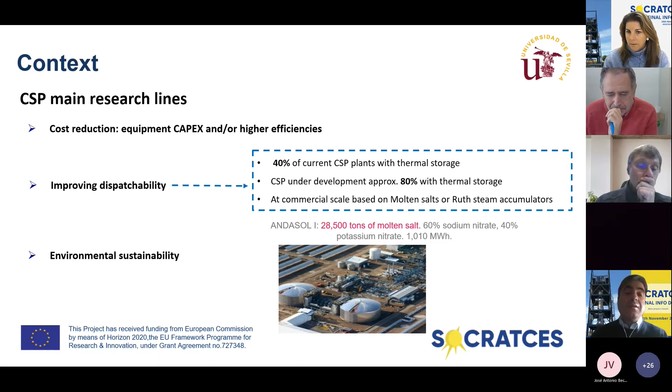Our project, SOCRATCES, is aimed at the part of dispatchability, providing a large energy storage capacity based on a non-toxic, abundant material. We base our concept on the calcium carbonate decomposition into calcium oxide and carbon dioxide.

Energy is stored by breaking the chemical bonds, and when heat is required, we mix again these products to produce calcium carbonate.

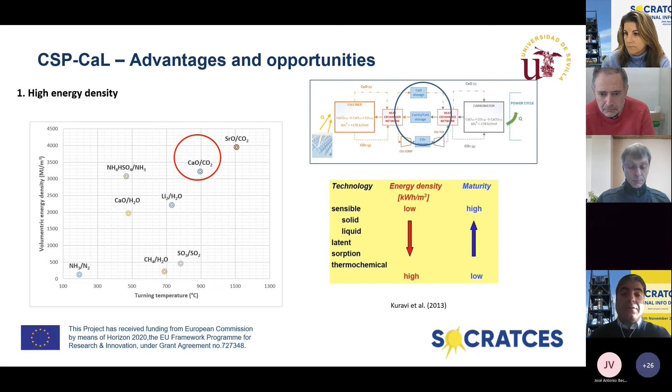It also has the advantage that the storage can be done under different strategies. It can be done at ambient temperature for seasonal storage, minimizing thermal losses and parasitic consumption of auxiliaries, or with a different strategy developed for daily operation. This can be done under different criteria and configurations, obtaining different global efficiencies with different technological approaches.

One of the most important characteristics of this concept is that it is based on abundant and stable materials. Limestone and dolomite have low price, are abundant and widely available, and are non-hazardous nor highly contaminant. These are characteristics for the large-scale deployment of energy storage systems.

On the side of the discharge, we have heat release. Depending on the pressure in the carbonator, we can have delivery temperature very high, which allows the integration of advanced power systems like supercritical carbon dioxide cycles, but also, at even higher temperatures, gas turbines.

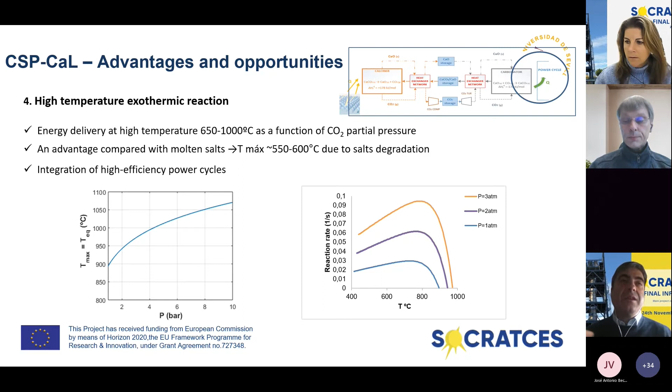The behavior of the carbonation will depend on the temperature in the reactor. Here you see the reaction rate depending on the pressure and how it changes clearly depending on the carbonator temperature. This is an important issue that affects the design, and it will be highlighted later in this webinar.

Also considering direct and indirect integration, we can use this excess CO2 in the carbonator directly as a heat transfer fluid, evolving through the turbine in a direct integration, avoiding the use of additional heat exchangers for the power cycle, but with challenges regarding the integration and dealing with granular media separation.

This is a direct integration, but it also allows the indirect integration, in which heat exchangers are provided between the heat release in the carbonator and the power block. It allows the integration of well-established technologies such as Rankine cycles, externally fired gas turbines, or, for instance, the supercritical CO2 cycle still under development.

Regarding the advantages and opportunities, materials and equipment are used at an industrial scale in many of the required parts of the system. Many of the equipment is already used in the cement industry. The type of reactors, entrained flow reactors, have been proved at industrial scale in other applications. So an important part of the equipment to be used at industrial scale is already available, or at least the knowledge for the development.

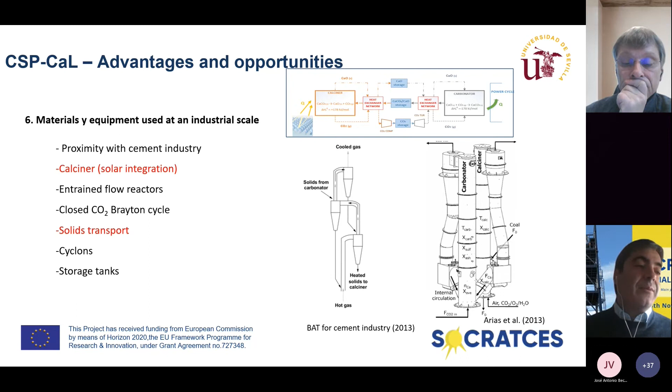The challenges: we have a high temperature receiver, and if we are operating at ambient pressure, we will need over 900 Celsius degrees. But also you can consider that it's a closed loop. Different pressures can be used, so I will show later on other opportunities for working at more reduced temperatures, or in other combinations to reduce these high temperature requirements.

If we go to these high temperature requirements, the size of the solar power plant will be conditioned, and probably we will need smaller power plants, not thinking 100 megawatts, but smaller in order to reduce the optical losses, increasing the optical efficiency. Besides, we have to consider particles residence times, thermal gradients control, and how would be the continuous operation.

Regarding the alternative for reducing the calcination temperature, we have tested within this project the effect of steam calcination. Today we will have a presentation related to the relevant effect and how it reduces drastically the temperature in very affordable conditions. How also helium calcination is a very promising or interesting option, and also how vacuum calcination affects things. All is related to the CO2 partial pressure.

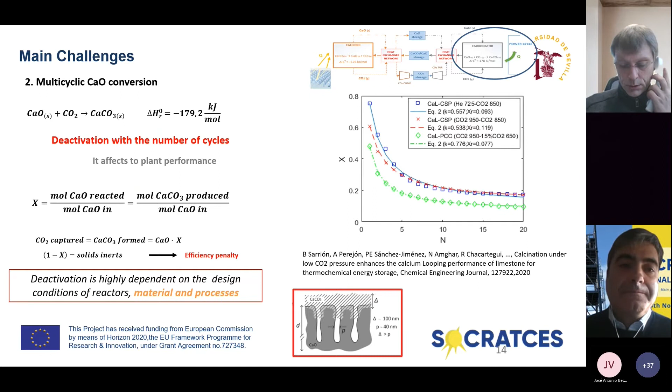Summarizing, we have calcium oxide precursors with low price, wide availability, and harmlessness. Carbonation for power generation or for generating heat in industrial processes can be obtained at high temperature, allowing high efficient generation of electricity or high efficient industrial processes. Reactants and products can be stored at ambient temperature, depending on the strategy. If we want seasonal energy storage or daily energy storage, different storing temperatures will allow different cycle integration.

We have a high energy density there to maximize storage capacity, and materials and process equipment, most of them are well known in large industries like the cement industry.

Regarding our SOCRATCES operation conditions, we are going to a technology readiness level 5. What we are trying to demonstrate is how, at these non-laboratory conditions, under a higher scale of flows and masses, the behavior of the material is, how the reactions are, and how the control and designs affect the different processes.

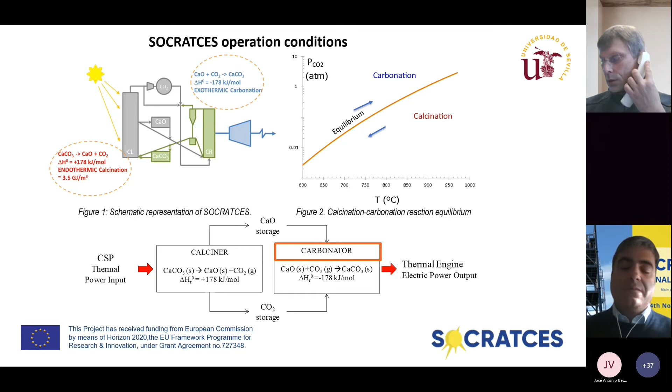So, for instance, we have studied how the partial pressure of CO2 affects the carbonation, or how this partial pressure of CO2 affects the calcination, regarding the level and degree of development of the different reactions and processes.

What we identify is that operating at high concentration of CO2, not necessarily pure CO2 but high concentration, the level of deactivation of the material is clearly different from the one obtained when we have atmospheres mostly with air.

We have that this difference in behavior allows us to deal with a more reduced amount of materials, easing the design, reducing the requirements for replacement, and showing high competitiveness because of the reduced cost and feasibility of the technology compared to potential designs based on CO2 capture conditions. This is an important result related to this project.

The objective of our project, we will show the level of accomplishment we have had in the following presentations. The SOCRATCES global objective is to advance the knowledge of calcium looping for thermochemical energy storage. We have developed prototypes of different components, studied their integration and performance. All the experiments and activities we have done are oriented to generate new knowledge about the whole calcium looping process, equipment, materials, reactions, transport, and so on, in order to identify and solve the challenges for the development of larger scale equipment to advance to the commercial situation.

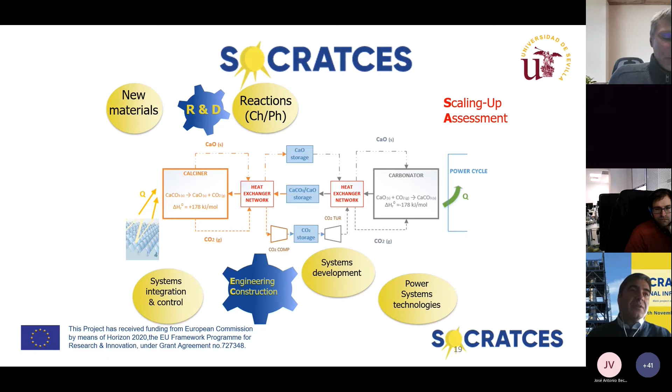Along these 4 years, we have developed new concepts regarding solar cyclone calciner, downer gravity closed loop calciner or downer, closed loop carbonator. We have spent around 2 years developing models, analyzing different designs, and within the constraints that we had.

We finally went to specific designs for a prototype conceived to get the maximum information about reactions, processes, and equipment. This design, or these designs, is not a beta version of a scale-up system, but is specifically conceived to get the maximum information regarding these parameters, reactions, processes, control, design, to take it into account for a potential scaling up if it happens.

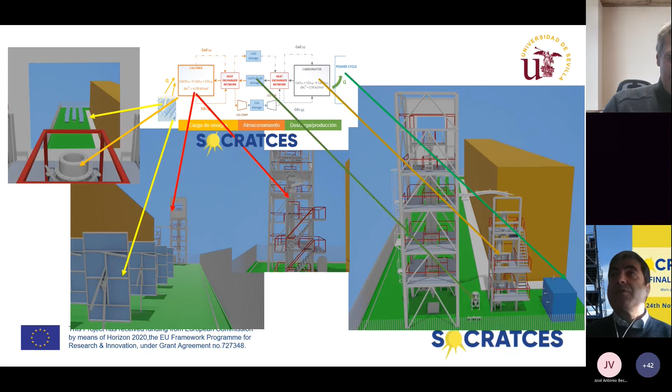So it's not a beta version of a power plant, of a real energy storage system, but in a smaller size - no. All the systems have been conceived to get the maximum information for a potential scaling up and to resolve potential issues, potential problems, or challenges.

Here you have how it looks, our prototype, how the different parts are related. Here you have the calciner, cyclone calciner, the vertical calciner. Here you have the carbonator, downer carbonator. Here the power block, the integration between them.

After many challenges, many of them shared with many other colleagues, the pandemic and the problems for constructing and erecting the pilot plant - but not only that, also to understand how everything works, to understand how to solve issues that we have learned.

And the plant provides results - not immediately. We have many issues, as you can understand, being first of its kind, the most important components. So until we understood completely the processes, the operation, and so on.

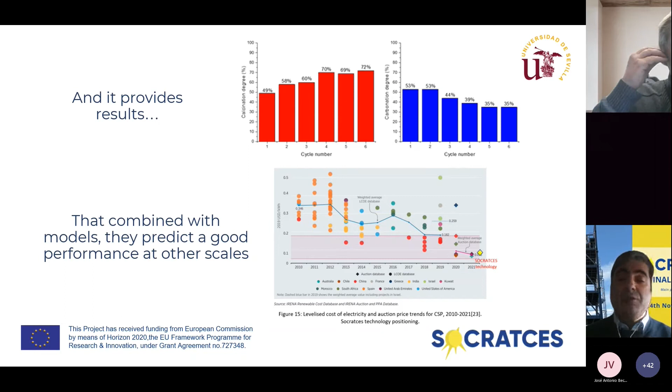Well, it has been a 4-year journey. We have had many stages, from the concept, advancing on the concept, the design parts, then the components construction, then erecting the pilot plant, then operating the plant, and now with this info day.

Until the end of December, we still will follow with the project and we will think of future steps together. All the information, you have it in our website, also on LinkedIn.

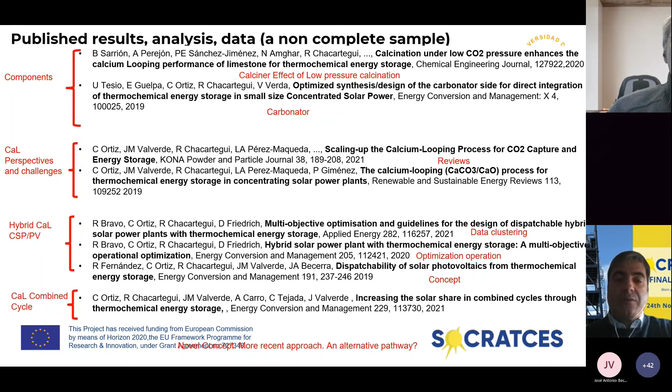Well, with this, I present this introduction about the technology, and I would like to share with you now.

I would like to share with you a video about the construction. I think it will give you an idea of what we have done.

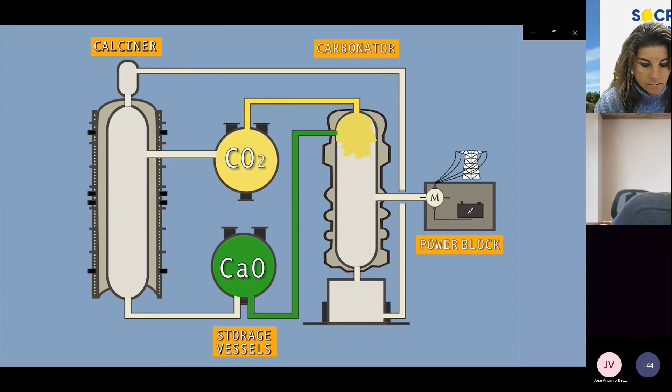Solar power is concentrated in the receiver to provide heat for the decomposition of calcium carbonate. The products of the reaction are stored at ambient temperature for hours, days, or even months. When energy is demanded, the calcium oxide and CO2 streams react to obtain again calcium carbonate, releasing the stored energy in the reaction. SOCRATCES is an integral and multidisciplinary approach where different knowledge areas are involved.

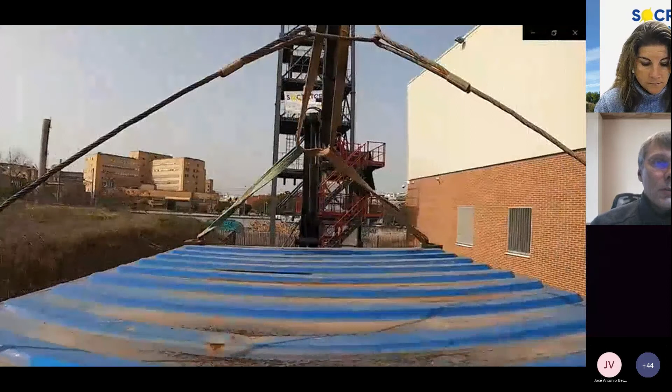SOCRATCES aims to demonstrate a novel concept of thermochemical energy storage. It uses one of the most abundant materials on Earth. It is based on the reversible reaction of decomposition of calcium carbonate into calcium oxide and carbon dioxide. Heat is provided by the sun. High temperature heat is recovered when the products join. This heat can be used in high-efficiency power cycles or in industrial processes.

In SOCRATCES, we are constructing a prototype, the first of its kind, in which we try to demonstrate, identify issues and solutions of the technology and the concept for evolving towards the commercial level.

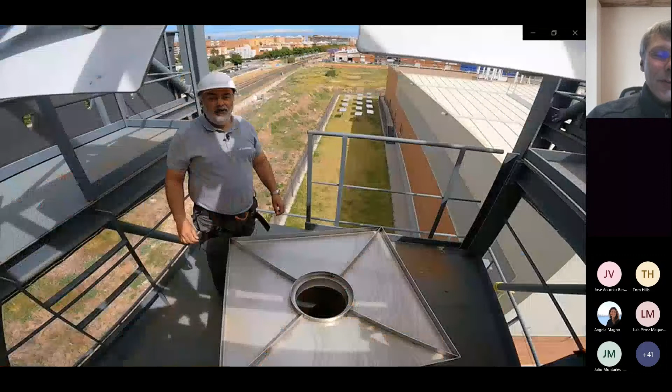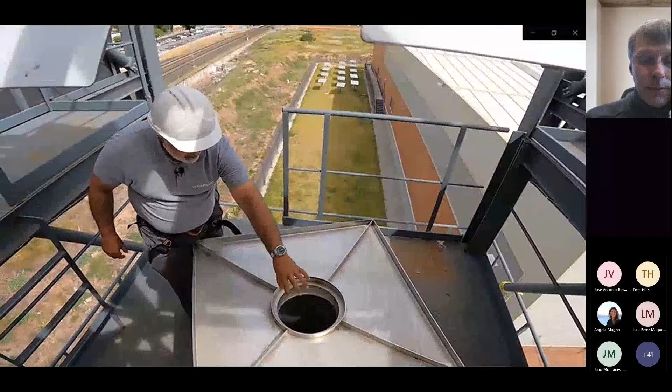We are on top of the calciner right now. Down there is the heliostat field, which reflects the solar power into this secondary concentrator, composed of 4 parabolic mirrors, which have the focal point inside the aperture cavity of the solar receiver. Here, an annular chamber receives the calcium carbonate along with a CO2 stream, forming a swirl which homogenizes the temperature, and the calcination reaction takes place.

This is the carbonator. Here we have the vessel in which we collected the calcium oxide before in the calciner, and put on top of a screw feeder which will dose the proper amount of calcium oxide to the reactor.

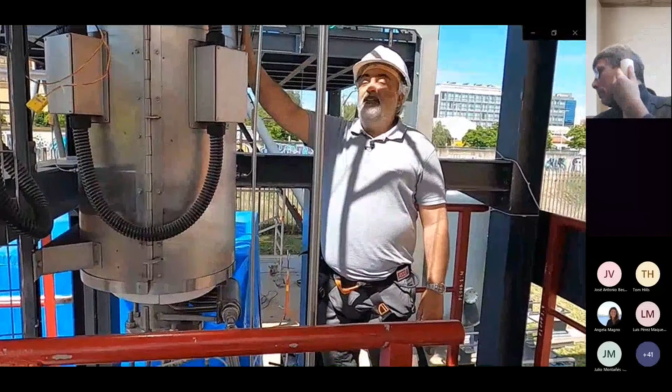This is the Carbonator reactor. Here the calcium oxide, previously supplied by the screw feeder, is mixed along with the CO2 stream in a reaction that releases energy. This thermal energy is collected by a bundle of tubes, which conveys to the stream of compressed air, heating the air and delivering the thermal energy to the Stirling engine in the power block.

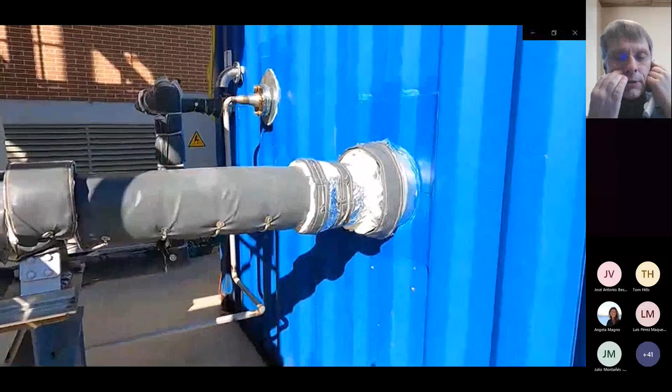The result of the reaction, which is again calcium carbonate, is collected in this lower vessel, which later will be moved to the screw feeder for the calciner tower, closing the cycle.

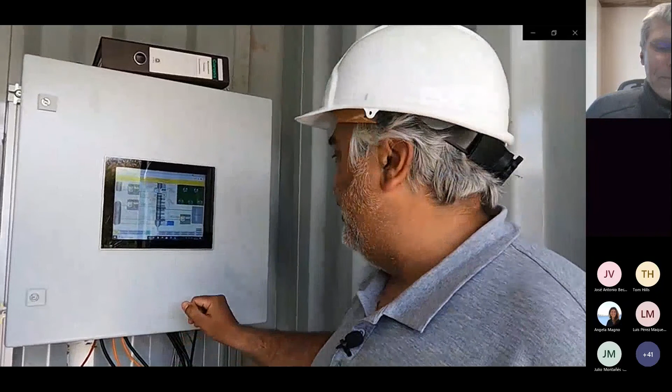This is the power block. Here we have two main systems, the Stirling engine and the main control for the SOCRATCES project. Here we have a local display, which we call HMI, Human Machine Interface. Everything can be controlled from this local display.

Okay, this is a video in which we try to show how our global prototype is, and to show at least a small part of how we work, how we have been working these months. So now to follow...

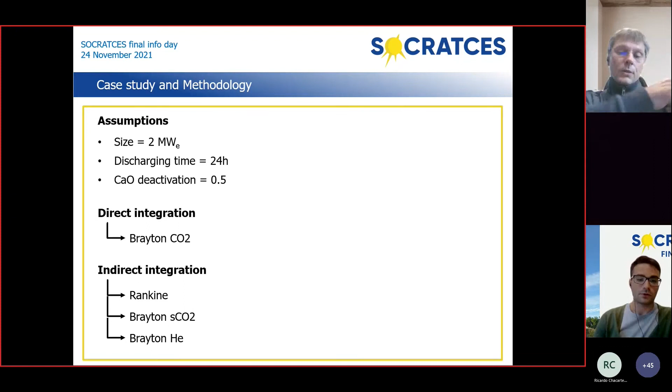The characteristics that we wanted to obtain from the optimization process are different. First, we want to have the heat transfer processes optimized, and also obtain a synthesis, design and operation problem that is well optimized. Finally, we have imposed that no external resources are consumed, so the power plant operates completely with the renewable resource.

Therefore, the most proper method that we have found is the HEATSEP method, which is a method for process integration. Here we can find, in a very compact form, the optimization structure.

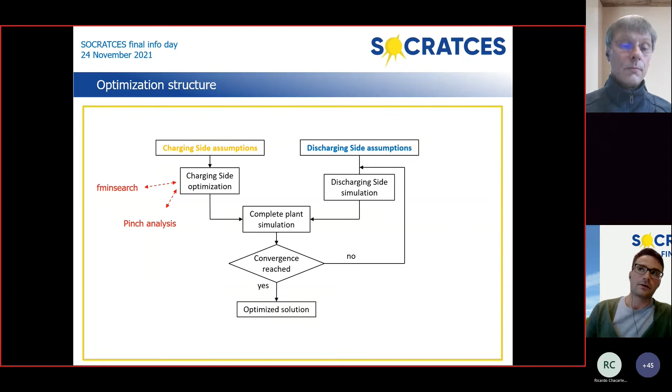The most important concept is that the charging side section is optimized separately from the discharging side, and then we make the simulation of the plant with both the charging and discharging section. The process is iterated until convergence is reached. As optimization methods, we have used the fminsearch function of MATLAB as well as the pinch analysis, while for the discharging section we employed a genetic algorithm, again the pinch analysis, and the bisection method.

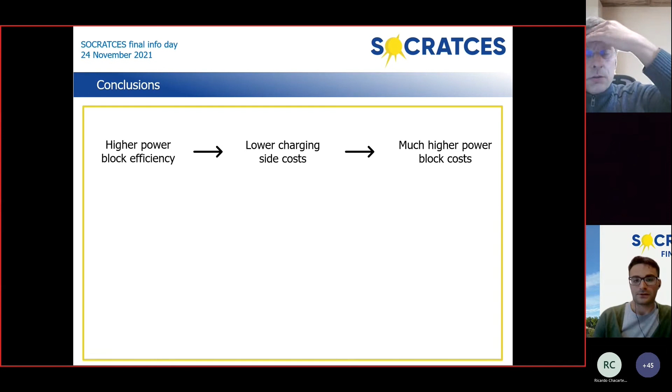So as final remarks, we can say that obtaining a higher efficiency in the power block determines lower investment costs in the charging sections, because of the lower sizes of the components. But this economic advantage is completely overcome by the higher prices obtained in the power block itself. In addition, if the power block is thermally fed directly on the carbonator wall, we obtain in all cases analyzed higher discharging performances, but at the same time the presence of the heat transfer on the reactor wall increases a lot the investment cost of the component.

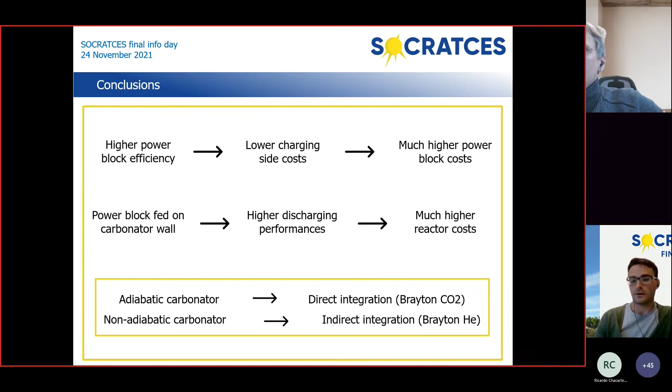So as a final outcome, we can say that if an adiabatic carbonator is chosen for the plant layout, then a good compromise between prices and performances can be the direct integration. Otherwise, if a non-adiabatic carbonator is chosen, an interesting alternative could be the indirect integration of the helium Brayton cycle. And with this, I have concluded. Thank you for your attention, and let me know if you have any questions.

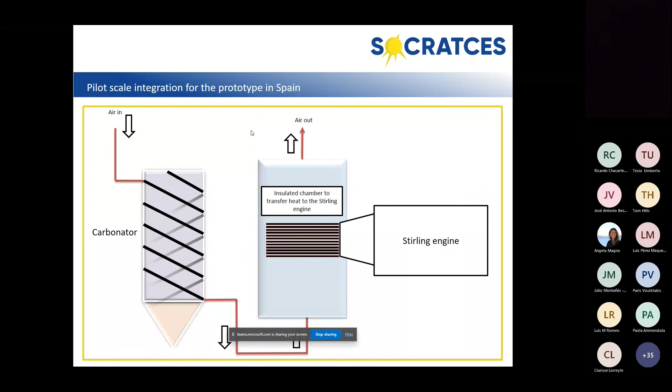We tried to address this problem by introducing a plate heat exchanger downstream with a very high effectiveness, if I may be bold to mention, around 80% if I'm not mistaken. So this recovers quite a bit of the heat that is sent to the power block.

In the case of the pilot scale plant, we had a Stirling engine, and an interesting question was whether it makes a difference how the hot air is introduced to this heavily finned cylindrical surface area available for heat transfer. We had to introduce an enclosure around the heat exchanger, and the question was how the heat would be fed to the finned surface.

The question was exactly how to feed the heating stream received from the exothermic reactor, the carbonator. What's interesting is the study of the related spatial arrangement of the velocity vector and the heater fins. Thus it essentially becomes an optimization problem. This is presented in this rudimentary scheme on the right, the extreme right image. The flow is bifurcated and fed in an opposed blast configuration, because we determined from our preliminary CFD simulations that this was the best approach.

If the flow was centrally fed and a central outlet took the exhaust away, we noticed that the performance was much inferior in that case. So we chose the alternative of the opposed blast configuration.

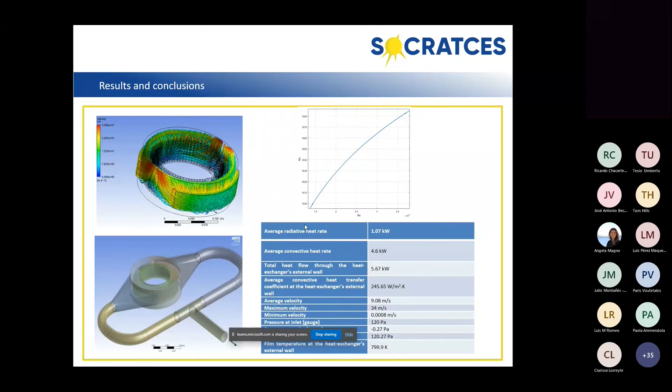So we used our own models. We optimized the configuration as well, using quite a bit of CFD and implementation in MATLAB. It was found that, going back to this picture, the one on your left, if we move the tangential entries gradually towards the center, it becomes a centrally blast configuration, and it appears that the performance is substantially improved. The heat injected into the engine core definitely sees improvement.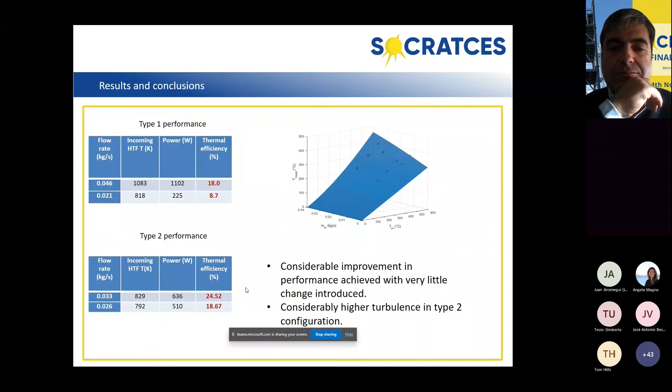Just to finalize, to give you a final glimpse of the results, comparing the centrally blast and tangentially blast configurations, it appears that in terms of thermal efficiency, it's 18% in case of the tangential entry, about 25% in case of the centrally blast configuration. This is just a glimpse of the model. On the right, you have the actual setup. The power block has been sent to Spain.

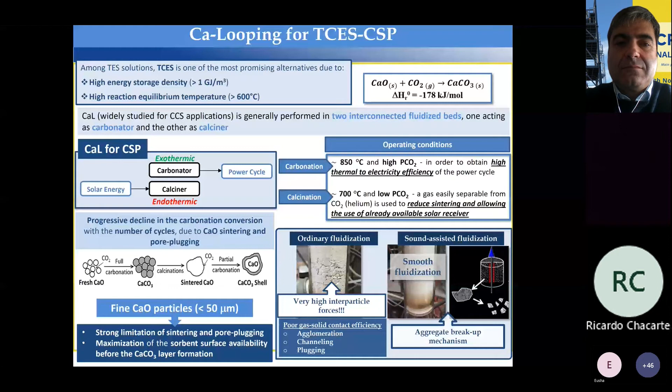Therefore, the aim of this study was to enhance the carbonation performance of fine limestone particles by means of the application of sound in a fluidized bed reactor.

The material, the sorbent used in this work, is natural limestone supplied by Omya. It is characterized by particle size smaller than 50 microns, and in particular it has an Sauter diameter lower than 4 microns, confirming that the material belongs to group C of the Geldart classification of powders.

All the tests have been carried out in a lab scale apparatus, consisting of a fluidization column made of quartz, 40 millimeters in diameter, equipped with a sound generation system. Prior to the calcium looping tests, the sorbent has been characterized from the fluid dynamic point of view by performing fluidization tests both under ordinary and sound-assisted conditions.

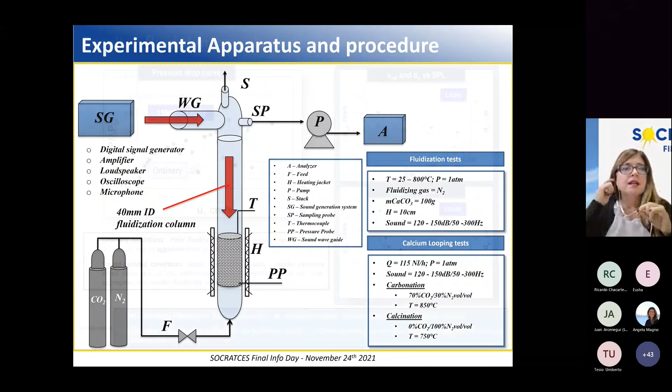Pressure drop curves as a function of superficial gas velocity have been obtained during fluidization tests carried out at different temperatures and under the effect of acoustic fields of different intensities and frequencies. The calcium looping tests have been carried out both under ordinary and sound-assisted conditions, and the sorbent is subjected to 20 carbonation-calcination cycles. Here you can see the results of the preliminary fluid dynamic characterization.

Here you can see the dimensionless pressure drop curves obtained at ambient temperature, both under ordinary and sound-assisted conditions. The results show that the fluidization quality is very poor under ordinary conditions. Indeed, the pressure drop curve is very irregular, and the proper fluidization regime cannot be reached due to the occurrence of agglomeration and channeling phenomena.

On the contrary, the pressure drop obtained with the assistance of the acoustic field is more regular. This is due to the breakup mechanism of the large aggregates inside the bed into smaller, fluidizable ones due to the effect of the acoustic field.

The role played by sound intensity and frequency has also been assessed. Here you can see the experimental values of minimum fluidization velocity and fluidizing particle size as functions of sound intensity and frequency respectively. The sound intensity has a beneficial effect on the fluidization quality. This is due to the fact that with increasing intensities, more and more energy is introduced inside the bed, making the breakup mechanism more and more efficient.

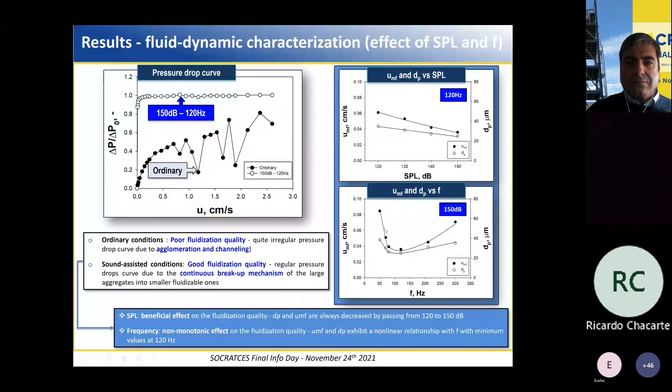Here you can see the comparison between the CO2 outlet concentration profiles obtained during the carbonation test under ordinary and sound-assisted conditions. On the right, corresponding results in terms of carbonation conversion as a function of time. It is clear that the application of sound is able to remarkably enhance the carbonation performance, resulting in larger values of carbonation conversion. In particular, the application of sound makes it possible to maximize the exploitation of sorbent reactivity due to the better fluidization quality and in turn the better gas-solid contact efficiency.

Here you can see the carbonation conversions as a function of the cycle number obtained during both ordinary and sound-assisted conditions. It is clear that the deactivation rate is reduced and residual conversion is increased when sound is applied. In particular, agglomeration occurs under ordinary conditions. On the contrary, when sound is applied, the agglomeration issue is solved and only sintering remains to cause the decline in the carbonation conversion.

In analogy to what we did for the preliminary dynamic characterization, we investigated the effect of acoustic parameters on the carbonation performance too. We found that both sound intensity and frequency exhibit on the carbonation performance the same effect as that we obtained from experiments.

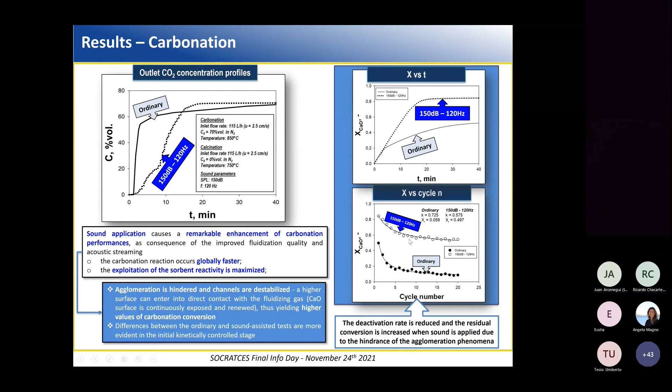To conclude, in this study we investigated the possibility to exploit the high reactivity and multicyclic stability of fine limestone particles in the sound-assisted fluidized bed reactor for thermochemical energy storage in concentrated solar power applications. In particular, we've successfully proved the beneficial effect played by sound application on the carbonation performance of fine limestone particles, making sound-assisted fluidization a very promising technological option. That's all, thank you for your kind attention.

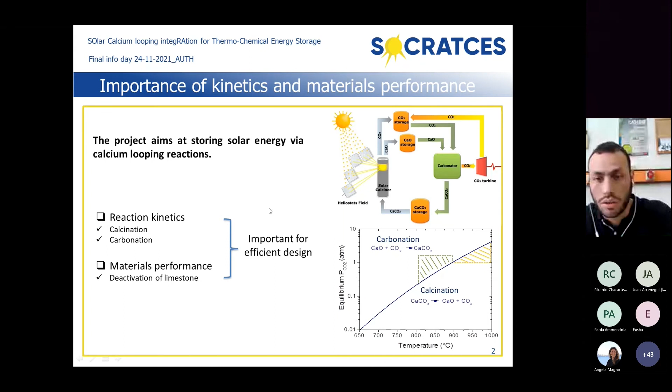We also carried out experiments in a thermogravimetric analyzer in order to apply multicyclic experiments.

The materials that we used included limestone, which is the reference material, but also materials containing an inert phase apart from the active calcium oxide phase, for example magnesium oxide or zirconia, which has been found experimentally to stabilize and mitigate the deactivation of the material.

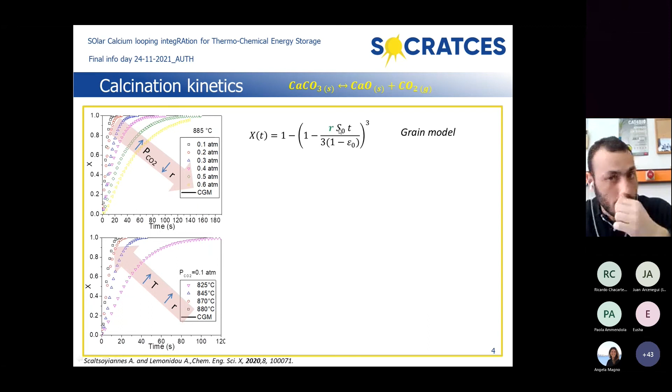During modeling, we used the grain model where we introduced as input parameters the initial surface area and the porosity of the material from nitrogen porosimetry measurements. After fitting this equation on each experimental conversion time curve, we derived the only fitting parameter, the specific rate of decomposition reaction. As you can see, there is a non-linear effect of the CO2 partial pressure on this rate, and we use this Langmuir type equation to fit this dependence.

This is for calcination kinetics, and for carbonation kinetics we use the random pore model, which is a similar geometrical model to the previous one. Again, we have some input parameters that are related to the surface area and porosity of the materials.

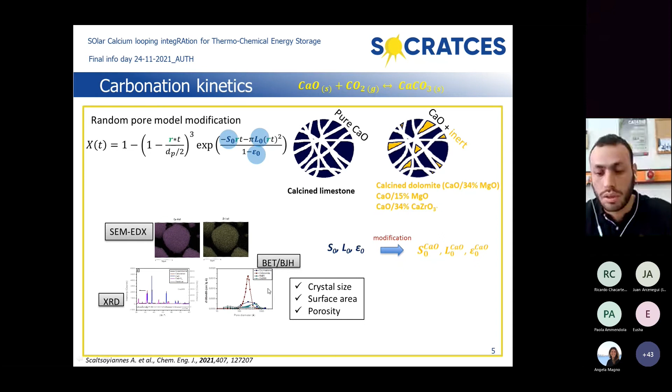In this case, we try to expand this model in order to apply it to materials that contain an inert phase also, apart from the calcium oxide phase. This was done by modifying the input parameters. We introduced new input parameters, which included information from scanning electron microscopy analysis, X-ray diffraction for the crystallite size of calcium oxide and the inert phase, and of course the surface area and porosity from nitrogen porosimetry. In the general case, we use these modified parameters as input in the model, and again fitted this equation to the conversion time curves.

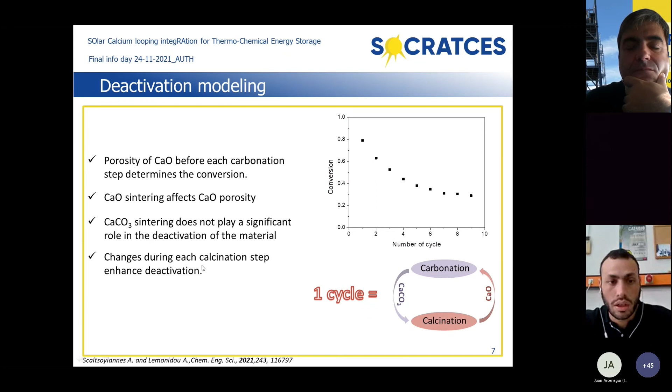From our study, we concluded that porosity of calcium oxide before each carbonation determines the conversion of the material. Also, that calcium oxide sintering affects calcium oxide porosity, while calcium carbonate sintering does not play a significant role in the deactivation of the material. Finally, changes that happen during each calcination step enhance the deactivation.

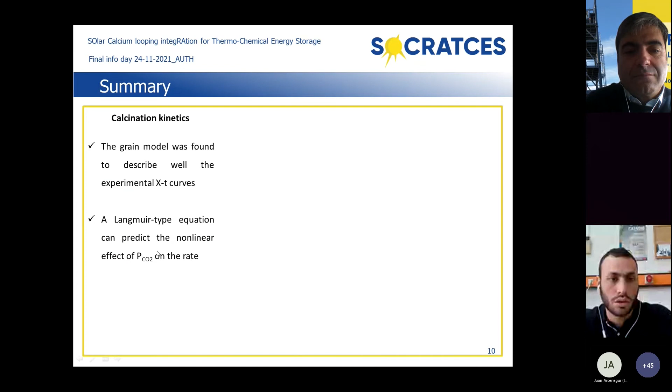So summarizing, for calcination kinetics, we use the grain model and a Langmuir type equation that can predict the non-linear effect of CO2 partial pressure on the rate. For carbonation kinetics, we expanded the random pore model to apply also for sorbents containing an inert phase apart from calcium oxide.

We found the linear effect of CO2 on the rate and very fast reaction kinetics. And for the deactivation, apart from calcium oxide sintering, also crystallization phenomena enhance the deactivation of the material, and we developed a model to predict the sorption capacity under different conditions of cycling.

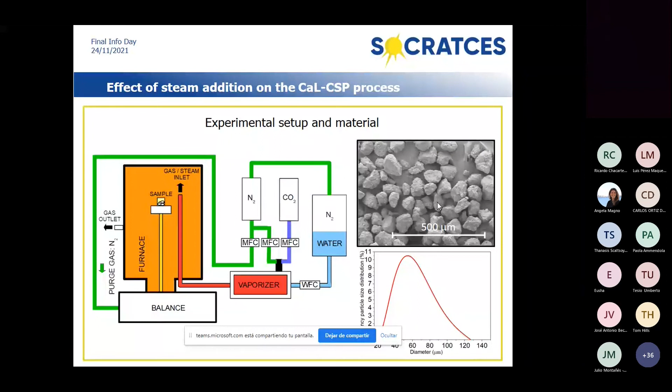With this method, which consists of obtaining the kinetics parameters without any assumption on the kinetic model, we were able to obtain the values of the parameters.

The conclusion is that the activation energy decreases with the amount of steam. This can explain why the presence of steam speeds up the reaction.

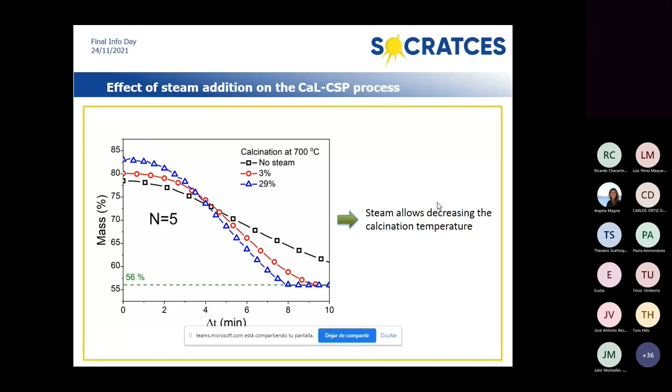As I said in the first slide, we were also interested in studying how it affects the multi-cyclic performance. What we found is that steam also increases the reactivity of the material.

This kind of more open structure will be less prone to pore plugging, and therefore it will allow the CO2 to reach the inner core of the particle.

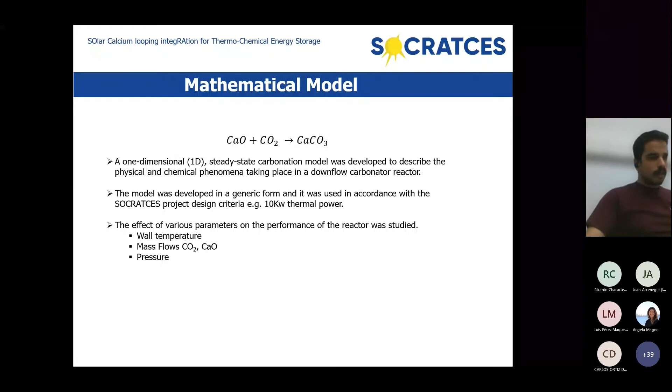The effect of the various parameters on the performance of the reactor was studied, such as the wall temperature, the mass flows of the solids and the gas, as well as the pressure. As an output, carbonation up to 60% could be achieved by monitoring those process parameters. Safety and efficiency of the process could be improved.

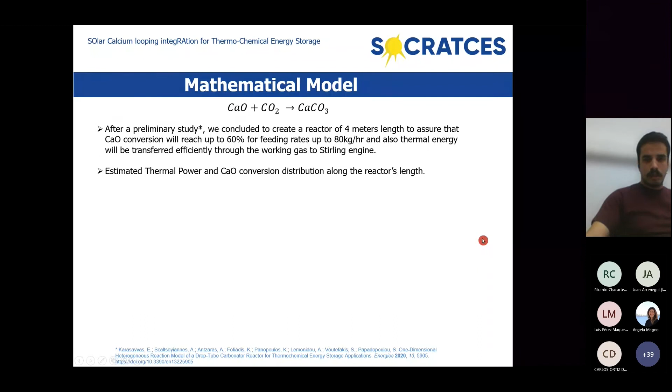Okay, now after evaluating those results, we concluded that the 4-meter reactor was enough to assure the desired calcium oxide conversion for feeding rates up to 80 kilograms per hour.

Furthermore, since the reaction starts at 700 degrees, preheating of the reactors was a necessity. For this purpose, 2 furnaces of 44.4 kilowatts each were used, and for the preheating of the calcium oxide solids, a furnace of 24.6 kilowatts was used.

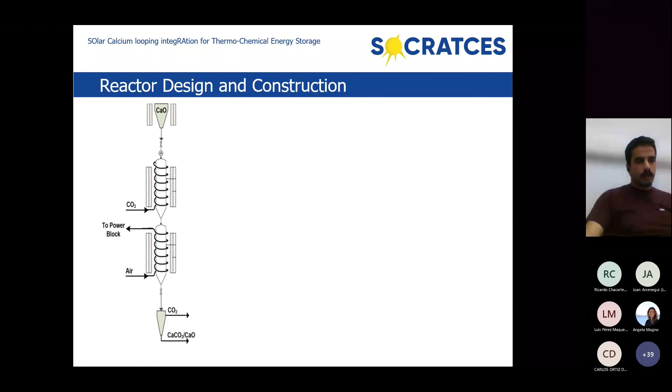Now here you can see the final assembly of the carbonator unit. The top vessel contains the calcium oxide solids. We can see the furnaces for the preheating of the reactors, and those are the 2 parts of the reactor encircled by the heat exchanging coils.

Finally, we can see some of the results. First, the conversion was tested here in our facilities in CERTH with some preliminary experiments, and we achieved carbonation around 65% at a temperature of 800 degrees Celsius.

Next, it was tested in the prototype unit in Seville. As you can see, the calcium oxide conversion depends on the reactor's temperature, where for 800 degrees Celsius, the conversion achieved was 77%, while for lower temperatures, the conversion rate drops significantly.

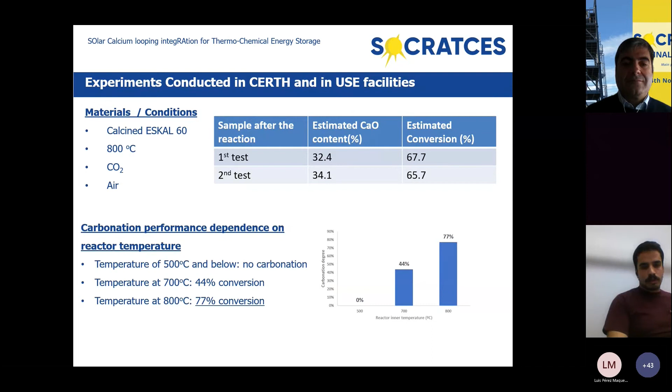That's all from me, and thank you for your attention.

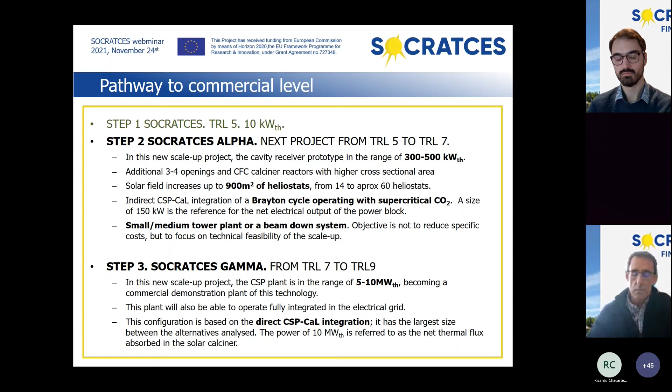Then, once we have this step solved, the next step, which is a commercial one, we assume will reduce more the uncertainties in the design. The last step will be to go one order of magnitude bigger, and then reach a full integration of CSP with calcium looping.

This is more or less the technology development for the future. Now we are going to analyze and give general ideas about the performance and the critical variables for the different equipment.

Regarding the solar field and receiver, which are mainly responsible for calcination, Ricardo has previously shown some good calcination figures in our installations. Here the temperature is critical; it has to be really high, around 930 degrees. But as has been commented previously, we can reduce these temperatures using steam or helium to make them less critical.

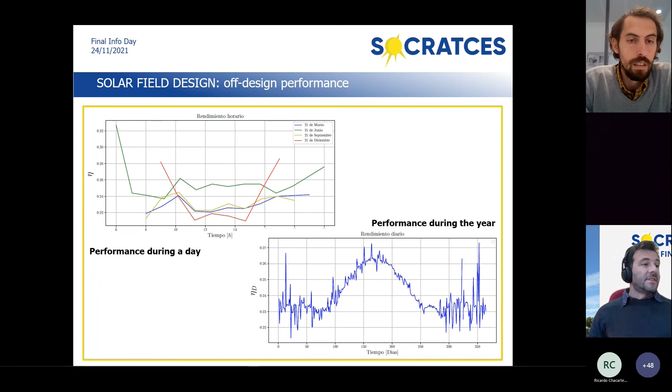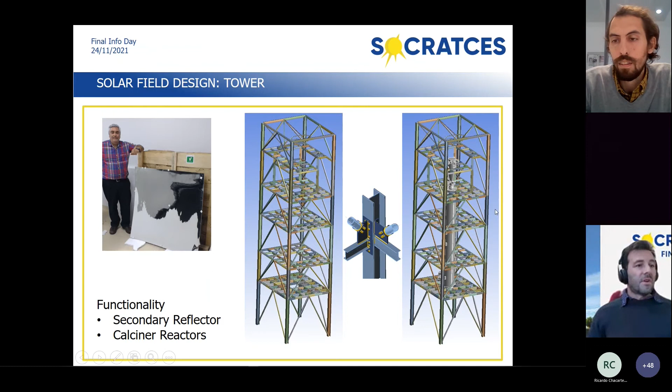Also, we had to build the tower unmountable, because the project should be taken to another location in the future. And most importantly, construction was okay, and the objectives were more or less done.

From the side of the cavity receiver, we had to deal with very high temperatures, so it was very important to select suitable materials for these high temperatures.

The big issue here was how to have, let's say, a radiation map onto the cavity receiver that is as homogeneous as possible. So for that we have done different tests, considering the material in an oxidized state, non-oxidized, painted with radiation pyromark painting, etc.

And eventually, in order to be able to integrate all the equipment coming from Greece, from our partners from Calix, also from TTC Germany, we had many different systems to integrate, and it was essential to have a proper three-dimensional BIM model in order to integrate everything.

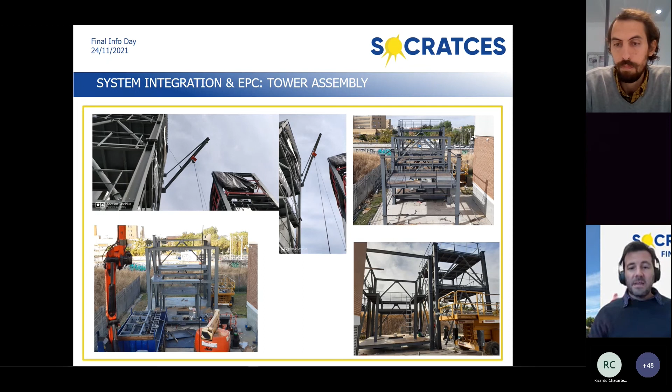Another interesting thing that we had to do was the storage system for the particles and the CO2. We use an OpenModelica model to size the storage tank and the control system. This is working very well, and the scale up is very easy. So we are very happy with this part.

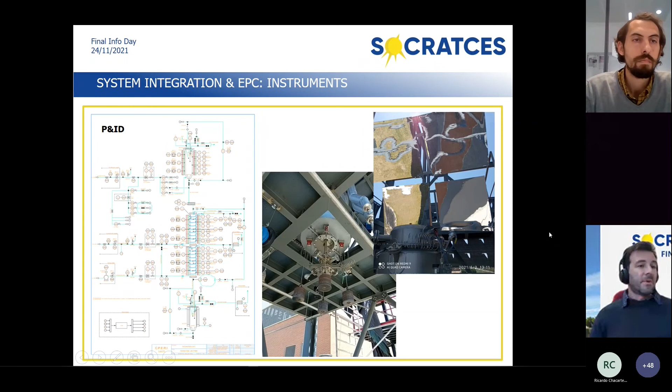From the instrumentation and control side, we were able to take all the measurements from the instruments and be able to control the system properly with the help of our partners from EasyTech. And I'm putting this picture here because we had to move many times the heliostats, and move and fine-tune the secondary reflector in order to improve the radiation onto the receiver.

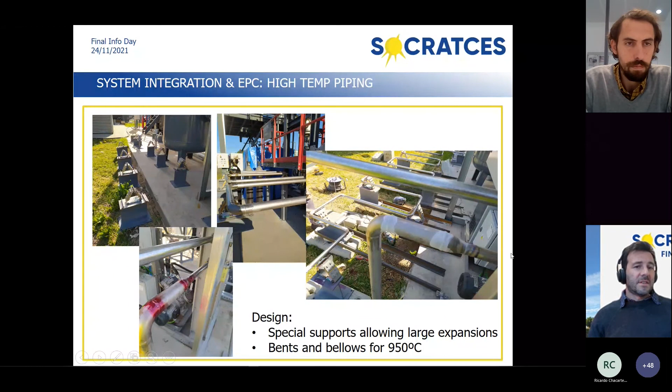Another interesting thing that is not the focus of the project, but at the end of the day is very, very critical, is how do you move the granular material around the plant. That was very complex at the end of the day, because some of the equipment was very critical and sensitive to the operation conditions, and also the high temperature piping, because we are moving very high temperature fluids. So we had to deal with this complex design.

Other than that, everything ran very smooth, and I would like to leave some room for Carlos to talk about the operation. So very shortly, some quick lessons learned from the solar field design.

The lesson learned is that low-cost technology is difficult to control. When we have a scale up, we won't be having this problem. The secondary reflector performance is difficult to quantify, and this is also true in real beam down systems in the CSP industry. We think that for the scale up, which was shown before by Luis and Tom, we won't be using the beam down technology, so everything is going to be easier.

From the point of view of the cavity of the solar calciner, it's really important to understand the performance of the different materials, because we are going to have very high temperatures, so the materials are going to oxidize and things like that, and we need to characterize the materials in these conditions.

For the system integration, it's important to take into consideration that the high temperature piping is expensive and complex, and the particles moving is a big challenge. So it has to be taken into consideration at the beginning of any further project or parallel project like this.

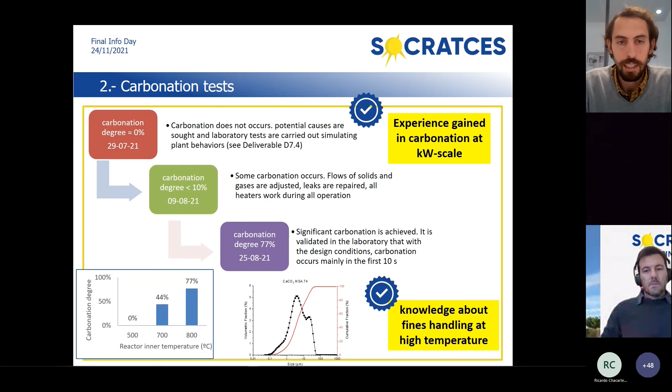Please, next slide, Juan. Thank you. One of the main results of the project is the experience we are gaining in multicyclic calcination carbonation tests. As said before, this is an important novelty because it's the first time this occurs at kilowatt scale. In this slide we can see the results we are obtaining at lab scale after the plant operation. The reaction occurs at prototype scale, and we send the samples to the CSIC lab, where our colleagues from CSIC analyze the reaction extents using XRD or thermogravimetric techniques. So we can see and confirm that the reactions occur as expected.

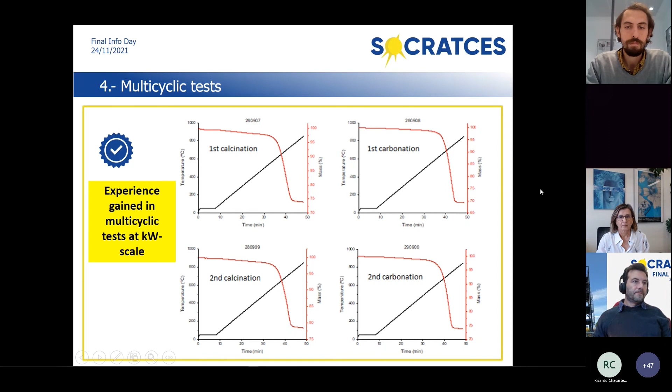Finally, we can see here an estimation of the materials' behavior obtained after the plant operation, from the lab scale evaluation of the reaction extents. We can see how the materials convert from calcium carbonate to calcium oxide after each calcination step, demonstrating that thermochemical energy storage occurs.

One of the main issues we are facing, as mentioned before by Juan, Luis Miguel, and Tom in the scaling discussion, is materials handling, because it's not easy to move fine particles of just some microns around the plant. So we are experiencing some problems with blockage or material losses, but this is information we are gaining from the operation, and we are effectively demonstrating that thermochemical energy storage occurs within the SOCRATCES project. That's all from my side. If you have any questions, please let me know.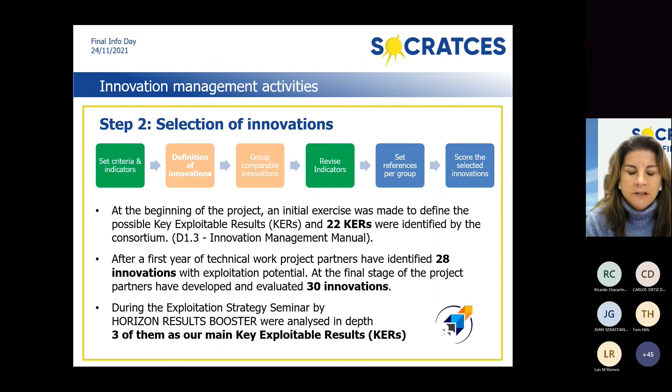Also, to be able to manage this innovation is most important. To evaluate this innovation, we grouped the innovations according to their identity, their nature. I grouped by work package and different kinds of innovation. So we made these different groups. Regarding the carbonation, we established models, equipment, and studies. Also, we made the same for solar calcination. In the case of the power system, we talk about integration innovation, or innovation related to the integration of the power system, the carbonator, and the Stirling engine. And finally, for the system integration and control, and for the validation and test, we managed all these innovations related in only one group.

In this moment of the work, it was very important to have a revision of the indicators, because it's necessary that these indicators were suitable for each of the innovation groups we established. The aim was that each group of innovation has been scored with the most suitable indicator, to know at the end which innovation will be promising and exploitable in the future.

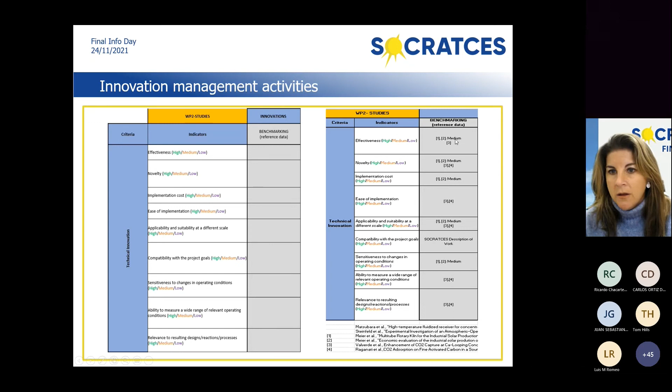Here in this table you can see better what I mean. Once we have the indicators, we need reference data, and we build this from another available system or from published material already in the market. For example, for the study related to the carbonator, regarding effectiveness it was marked as medium, and regarding novelty also medium. This reference data allowed us to finally score our innovations.

So this is the main result of our work in innovation management. We tried to score qualitatively as high, medium, or low, including explanations, and we did this work twice: once previous to the prototype, and after the prototype construction and operation, with the results that Juan and Carlos explained to us. This process allows us to compare the initial assumptions the consortium had in mind, according to the studies and the design, with the final results, so we could know if we were wrong or if we achieved our goals.

So the evaluation has led us to identify which solutions are more competitive and promising for the future, for further development, or even to reach the market.

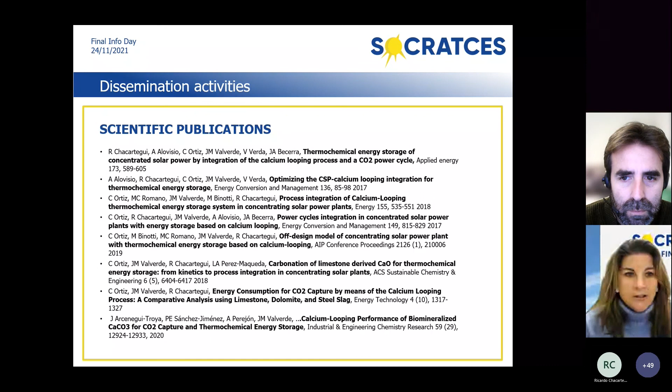Finally, today we are at our final info day. We have had a lot of scientific publications during the project. This is just a summary with some numbers and figures that aren't updated - I think I need to update them - but we are very happy because we think we have very nice and good results from all our work that gave us the opportunity to produce different papers.

Finally, we are open for networking, to continue exploring synergies with other projects. We developed several newsletters together with this group of CSP projects, and we have also been invited to be part of this ecosystem stories. We are very happy because we think CSP is very promising for us, for continuing further development and further opportunities for SOCRATCES technology.

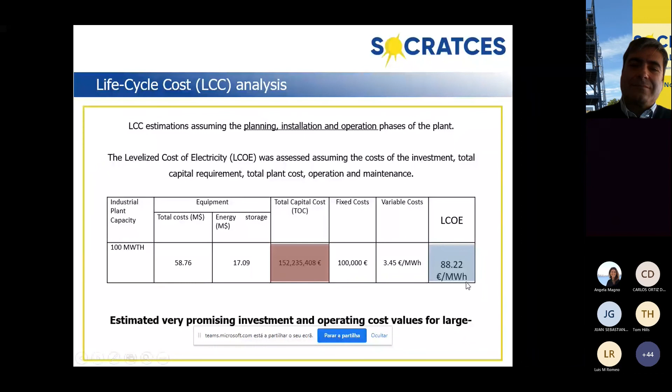it was assessed a total cost of 152 million euros, which includes the planning, installation, and operation of a CSP technology. Importantly, this could give a significant contribution to decrease the levelized cost of electricity to 88 euros per megawatt hour.

So based on the LCC analysis, and with the aim to enable future investors to have a perception of the return rate, we developed a dynamic tool to simulate the main financial feasibility indicators, such as the internal rate of return, which is the financial metric to assess the attractiveness of an investment, and the net present value used to analyze the profitability of this project.

So this tool includes the analysis of several factors such as time horizon, the investment costs, the installation costs, operation and maintenance costs, for example the price of energy and the energy that could be produced.

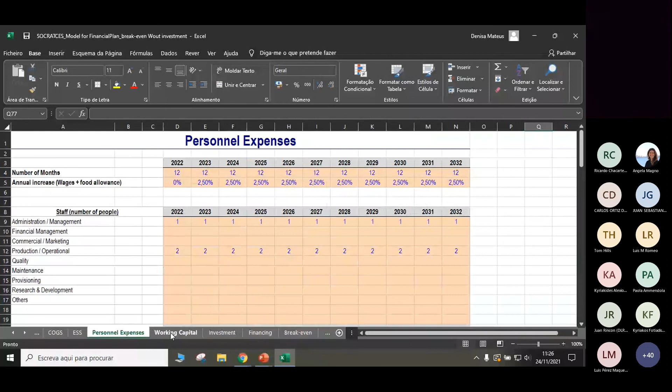So just for you to have an idea of the tool: this is an Excel file where we can introduce all the preconditions to be assessed. For example, regarding sales and services, associated prices, the definition of energy costs, even expenses with personnel, and the capital of investment. So a lot of factors could be included, and at the end we can estimate the main financial indicators.

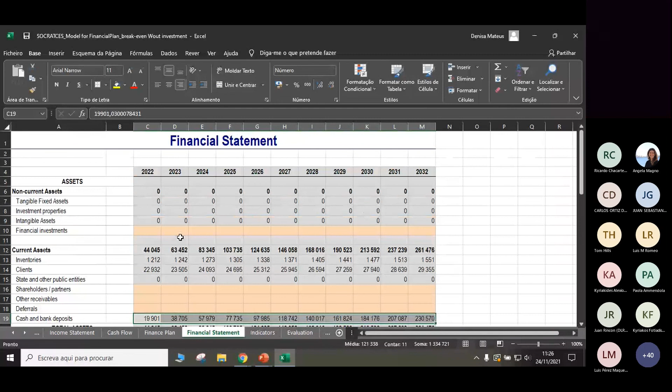So depending on the information provided by the customers, this tool enables us to estimate the profits and assess how these factors could influence the return rate. Our aim was to develop a tool that could help understand where we could improve, or which factors we could change, to make the technology financially viable.

So, for example, for a hypothetical scenario where we assume an initial investment of 100 million euros, an industrial capacity of 100 megawatts for a period of 10 years with a construction phase of 2 years, and assuming an energy price of 120 euros, much lower than the real one estimated, we can have an internal rate of return of almost 7% and 7 million euros of net present value, without considering the initial investment.

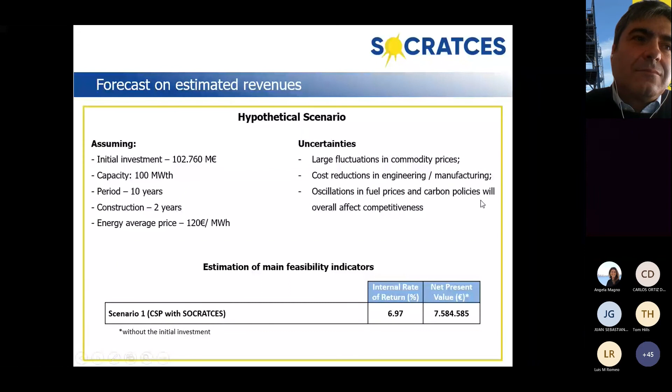Although these estimations are useful, there are some problems that cannot be considered over a long time, for example large fluctuations in commodity prices, changes in the price of engineering and manufacturing, oscillations in fuel price, and the effect of carbon policies that could affect the competitiveness of the investment.

So just to conclude, SOCRATCES technology could take advantage of several market opportunities, namely established CSP industries, mainly in Spain as a global leader, because there are plans to enhance the capacity of Spanish CSPs with retrofitting systems. Also the United States, the second leader. Moreover, new CSP projects mainly in China, which is developing several CSP plants under construction, also the United Arab Emirates, Chile, and India. Moreover, emergent economies that have plans for future CSP projects, such as Morocco, Zambia, and Botswana.

So I'd like to thank you all for your attention.